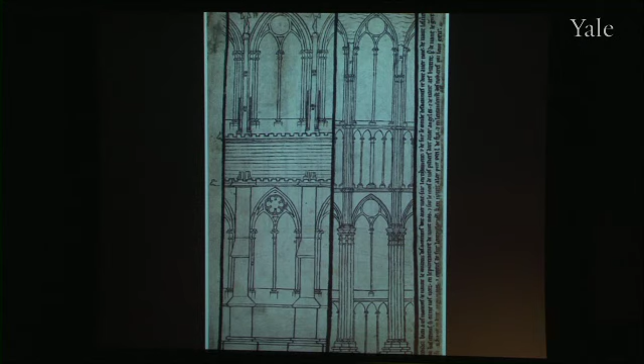If we go all the way back to the origins of representation, we see that early plan drawing was executed directly at full scale. Gothic buildings were drawn on the ground with ropes.

What did the scaled plan drawing, the plan drawn with a stylus on wax tablets or parchment, represent? It represented neither the ropes on the ground nor the idea that the lines would extrude. There was no projective implication. The plan was already on the surface. It was all about allocating areas on the ground. In short, architectural drawing was not originally related to geometry.

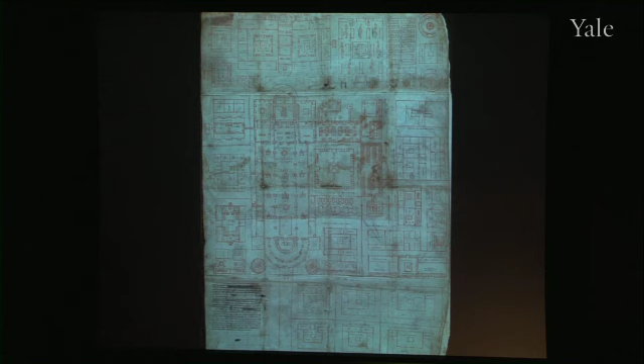Only later would perspective, a foundational element in projective geometry, become considered an advanced form of drawing. What I will focus on now, and what is perhaps most important for the role that projection, as opposed to picture drawing, plays in architecture, is the foundational principle of perspective projection, but in particular, sectioning.

I would like to argue that with perspective came a profound redefinition of what a plan is. There is a world of difference between the pre-perspective plan and the plan after perspective. From then on, plans are implicitly derived from cutting through, as opposed to drawing upon something. And this is what makes them so much like today.

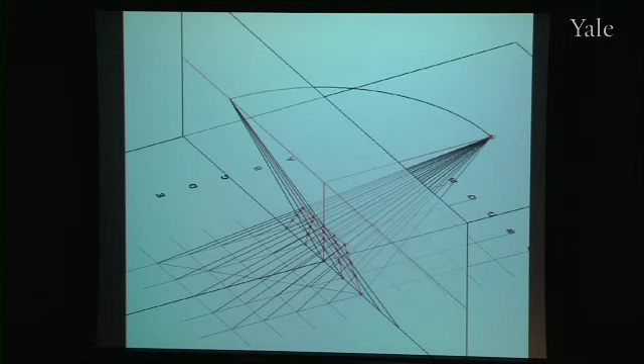It was during the Renaissance that we saw the principles of perspective formalized. The demand for realism and the alliance of mathematics and nature motivated the invention. Projection is a transference of three-dimensional points in space to a flat surface. It translates from 3D form to flatness, and the rays of light passing through points meet in one, the eye, which interestingly, projectively, is coincidental with the vanishing point.

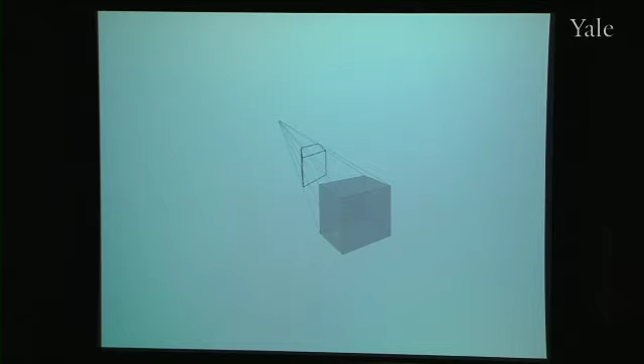A slicing plane, and this is what interests me most, is like a section cut through these rays, and it produces the matrix of points on a surface, which is a section, and ultimately a picture plane. And these points, when linked to one another, create a projection of a scene.

In the 17th century, this changed. What occurred is a description that brings into correspondence the representation of objects and the illusory distortion of these according to the idea of perspective. This is Desargues, who combines the sectioning of solids with perspective representation. Here we see that he has brought these two techniques together, the orthogonal and the conic projection, the parallel and the conic.

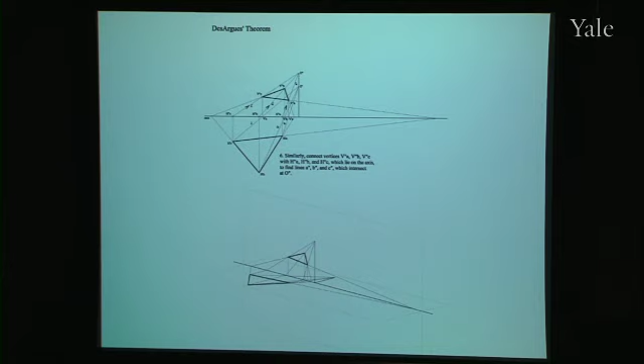And in this way, the two are finally joined. Thus we have before us a situation in which we cannot distinguish between the illusory, the picture, the object, the section. It's all in one system.

So one could say, with all of this behind us, the question of the conference today could be, rather than 'is drawing dead,' could it be that the section killed drawing? I would say theoretically, yes, the section did do that, and practically, no—or not considerably so until considerably later.

Before, during, and after the age of perspective and section, buildings were designed and drawn in two dimensions, both in elevations and in section, and were assumed to extrude, but only empirically, not by projective means. With the arrival of paper, and with Raphael's recommendation around 1518,

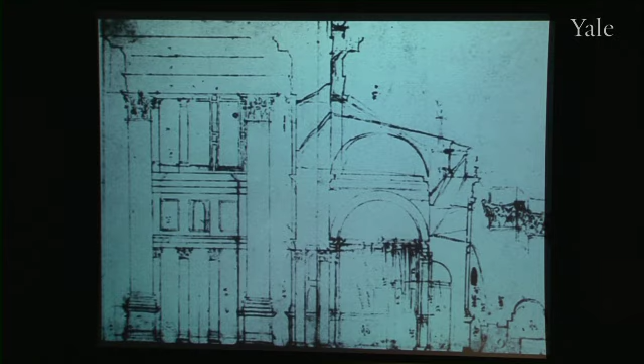the plan is accompanied by the representation of its elevation, but indirectly depicted as a pictorial elevation, showing two sides at once. The projective techniques were only used to pictorially represent preconceived ideas, or were used by the guilds for the purpose of constructing three-dimensional idiosyncratic shapes, units of construction. Projection then was synonymous with stereotomy, stone cutting.

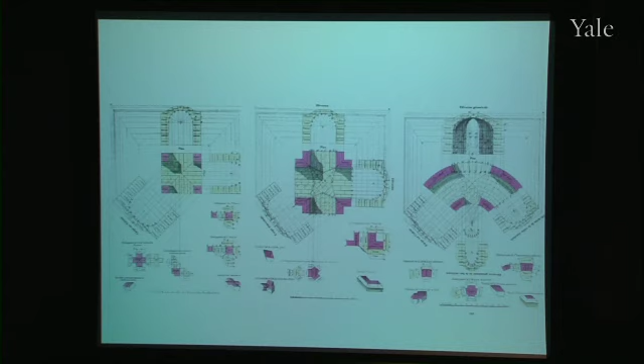In this sense, finally, perspective becomes a means to build the very plan that we understand the section cutting implies when we think through the principle from its origin.

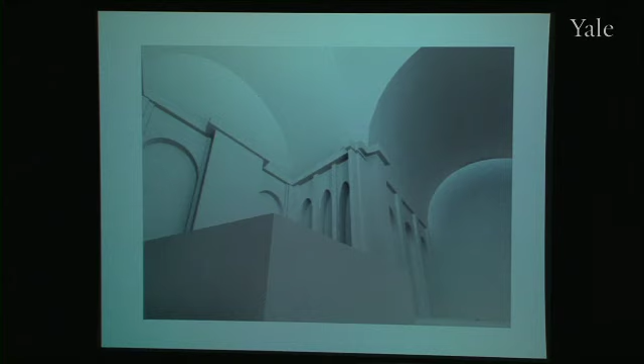Probably the most important implication in the analogy between section thinking and perspective is that they share the idea that the object represented is in some sense a complete whole—an entirely new way of thinking that appears for the first time in the Renaissance. Architecture is preconceived.

Following from it are the plans and perspectives that are cut, projected, and cut again. And yet this idea was not widely practiced or understood. A rare exception came in 1515 with Peruzzi, who used perspective to represent the plan explicitly as a horizontal section.

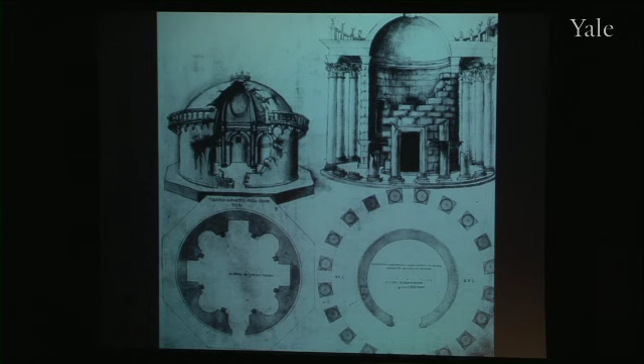Previously, buildings had only been partly cut away in vertical sections. It should be noted that despite the fact that it was perspective which was so formative to this significant change in the way the plan was conceptualized, it would only be used by architects for a very short period, between the mid-15th century and the early 16th, when it was given up in favor of orthographic projection entirely.

Meanwhile, the habitual segregation of empirical two-dimensional plans and section drawing from three-dimensional stereotomy continued, and the plan as section went unrecognized. We can leap forward and see that Corbusier's 'plan as generator' perpetuates this long-held habit of segregating the uses of section, reinforcing the concealment of the logic of sectioning inherent to the plan.

With computer modeling, what we have is not the maturation, but rather the realization of a profound change that occurred with the brief period of perspective.

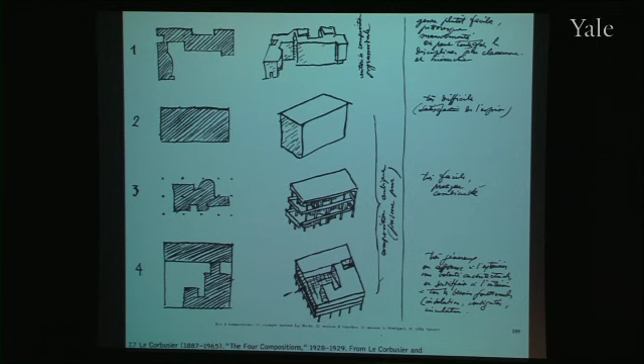Architectural space must keep stacking, however, and it would seem that until otherwise, its levels will still be accounted for in plans. This is not to mention the fact that the plan still holds sway at the drawing, as the drawing convention that correlates with the navigation of architectural space, something that the section does not do, the vertical section, that is.

The computer has brought about overall building forms such as this one that do not extrude from two-dimensional originary plans at all. Clearly, the process has been reversed entirely now. We have three-dimensional forms fully formed, literally, not only in the imagination, before we make plans.

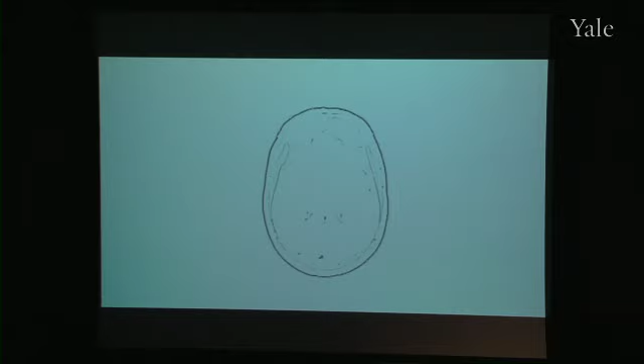And so, finally, plans and sections are literally results rather than origins. Now, there are buildings for which a plan is not only not a generator, but is anatomical. I call this type of plan anatomical since it is like an anatomical section. It should be noted that this extreme idea actually has, as one of its main progenitors, this building.

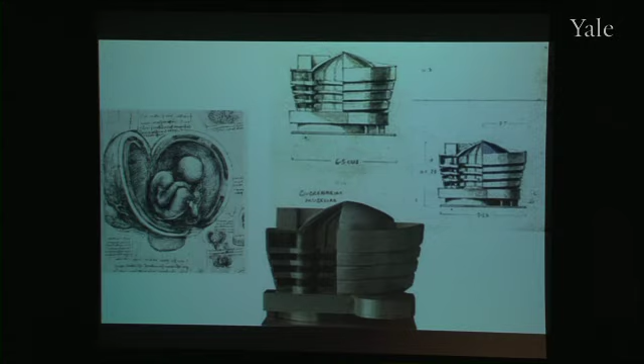A pre-computational building, of course. And we find here the idea most explicitly represented that the plan is of no particular consequence, insofar as one would think of it as a generator.

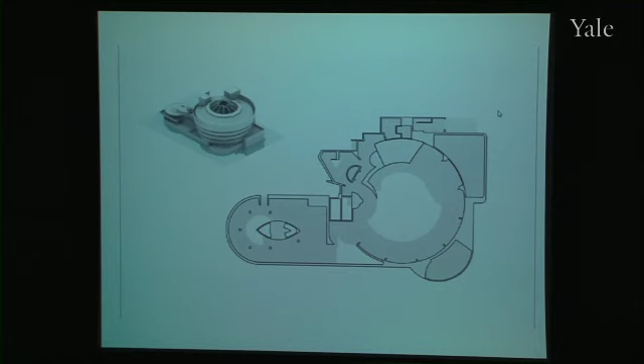The plan instead is more like, at any point in this building, a single frame in a succession of frames. And here, for the first time, we have the analogy to the filmic medium. Without extrusion, we have a continuously developing form of architecture in which any plan represents the principle of projective sectioning, finally, and most straightforwardly, which, as we have seen, superseded drawing long ago with the arrival of perspective.

Just to be clear, though, we are a very long way, of course, from the time in the early Renaissance before Raphael, when draftsmen who thought above all in terms of plan would often find themselves somewhat surprised by the exteriors which resulted from their plans. Now the building is embodied fully a priori.

With plans behaving as projective sections in succession, and in particular with the skyscraper, we recognize the changed significance of extrusion. If the filmic medium becomes a more apt analogy for architectural representation than pictorial perspective, extrusion assumes a new definition.

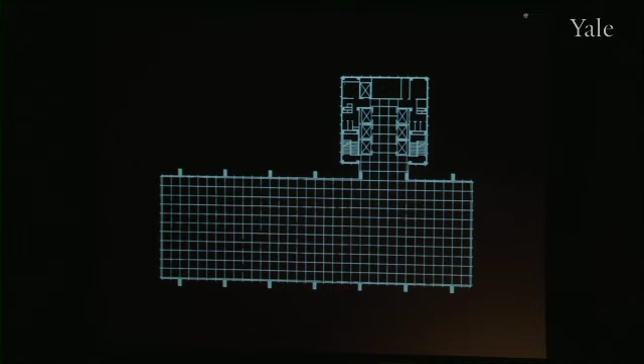A new definition exemplified most typically by this modern skyscraper. For extrusion, too, produces a continuously developing form, but not with a changing shape.

Here we have a very interesting moment where a building turns into a very particular genre of film. It may be useful to take this analogy to an extreme and understand that if the Guggenheim is filmic, it is conventional narrative film, continuously changing and developing a form over time in a very particular way, and very linearly.

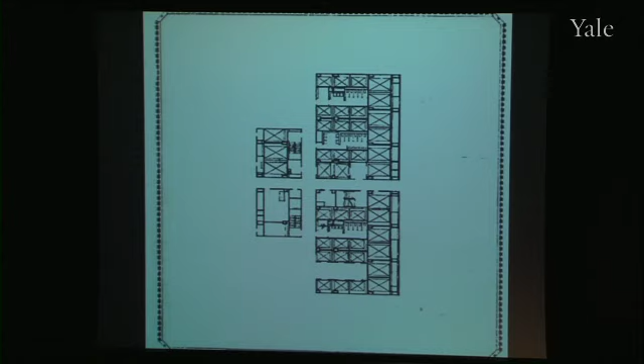But if the extruded skyscraper plans are slices too, then it is analogous to non-narrative film. And we could, just now, make a parallel, and this is a stretch and a peculiar one to make, but I think useful for this argument, to films like those of Warhol, and here we have Sleep, in which the content is radically reduced, becoming secondary to a fixed shape.

That is, the figure almost not changing, fixed, at least in the mind of one who expects a narrative. Little changing from frame to frame, hours of inactive sameness as opposed to development. Warhol encourages distraction and wandering attention, and in this sense, clearly has moved film toward architecture.

It is interesting to recognize that extrusion, the most typical formal attribute of modern architecture, that is, as it produces stacking, perhaps more than anything owing to the elevator and the steel frame, which we continue to have to deal with, despite all of the fluidity that Patrik seeks.

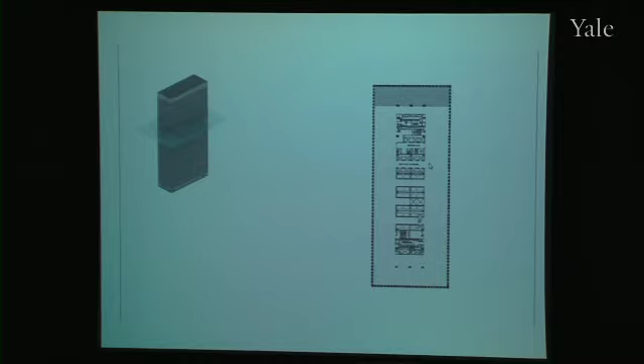Perhaps more than anything, this is what makes these radical avant-garde films more analogous to architecture, and much more so than the rare anatomical forms which, despite being prevalent in the academy, are rare in the world, that is, those which actually are closer to conventional film, those forms that are today so popular that I'm referring to.

You saw there the cutting plane of no consequence moving through the tower, whereas, of course, in the Guggenheim, we saw a development occur.

Now we have something else, and this is the concluding point. Perhaps the essential distinction between the anatomical and extruded buildings, both of which populate the imaginations of architects one way or the other, whether they like it or not, the essential distinction between them and their plans is determined by the concept of duration. Sleep demands the audience to endure the unendurable boredom of sameness in a medium that is expected to move and develop.

Conventional narrative film precludes any recognition of the constituent frames that build its movement. Between these two architectural extremes, the anatomical versus the extruded, or the narrative versus the non-narrative, there is another model, the montage, which makes explicit the role of spatial successiveness, the stacking inherent to all of architecture after the skyscraper, as represented by the plans that pile up and do not change, analogizing the cutting and editing we have been talking about.

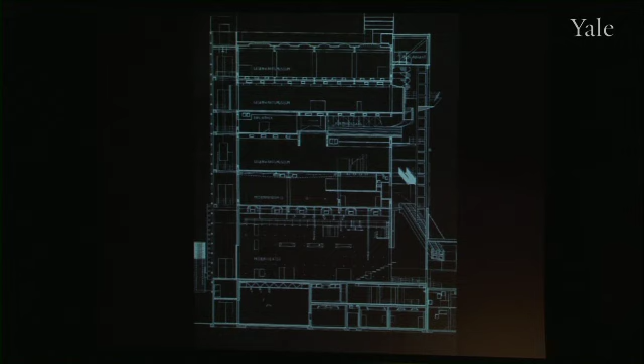The closest architectural project to La Jetée is Koolhaas's Karlsruhe Center for Art and Media Technology, composed of discontinuous and differentiated plans. Inside the rather cubic building, plans populated by the vertical struts of Vierendeel trusses alternate with open plans to produce a stack of spaces that, like an architectural montage, evokes a series of radically different architectural types, arguably the architectural equivalent to time travel.

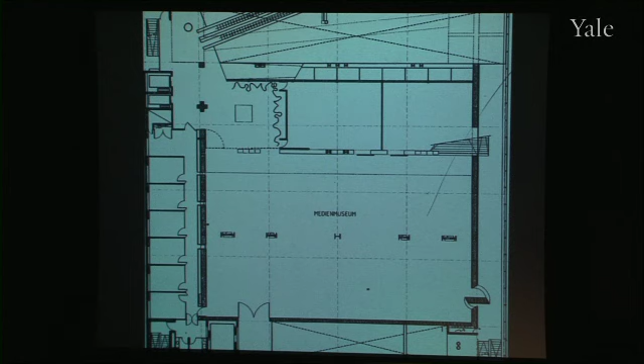Thus we have here a building that exemplifies his theory in Delirious New York, where piling, slicing, and piling up is caused by a culture he calls congested. Only the extrusion of the envelope maintains a constant that holds the disparate interior plans together, just as linear sequence, by definition an unassailable technical support of the filmic medium, holds together the stills of La Jetée.

As a tentative conclusion, recall that the concept of sectioning and perspective projection once seemed to be an advanced form of drawing. But for architecture, projection now appears to have been the harbinger of an era in which the plan would be defined as one of a series of successive slices through the three-dimensional models and structures that truly govern architectural and spatial composition—that is, after it's been thought that way.

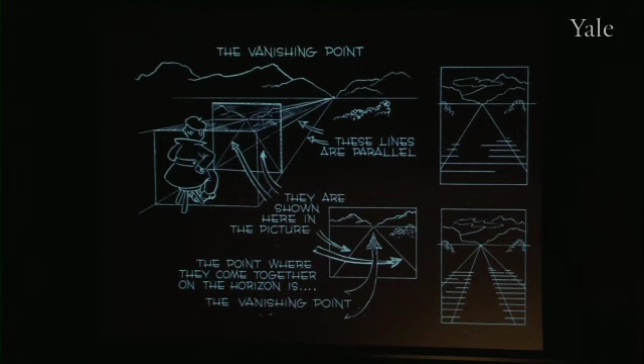So if we look at the vanishing point, there was a moment where it was a very simple thing. We all learned how to do it, and train tracks were the way you could understand convergence.

But if we step back a few centuries, the criticality of the vanishing point eluded painters, and by attempting to suggest depth and distance, the diagonal line and diaphanous backgrounds implied the inhabitation of a territory where buildings and landscapes were infinitely larger than we could imagine on one paper.

But the control of this vanishing point, if you will, to accurately depict depth and distance aided the representation of architecture. And architects, who were also painters and set designers, leveraged the compressed space of the stage set to suggest not only infinite depth to one vanishing point, but perhaps to a few, multiple vanishing points.

So you could say that the distortion necessitated a precise location, or station point, of the implicit picture plane to allow the panoramic access to the multiple vanishing points, and the single vanishing point with the converging diagonals in the center shifted over when the diagonal came into play to something far more complex.

In fact, you could say that Alberti in 1435 had advertised the perspective method in his book On Painting, and that how-to was extraordinarily influential.

But perspective has been a suspect tool, and critical voices of the Renaissance, while acknowledging it generated more precision in the potential, observed that it was a deceitful practice, always distorting true measure.

So Piranesi was a very skilled man in many ways, but also a skilled theater designer among his many talents, and he took liberties with the vanishing point. The act of drawing, actually inscribing an etching tool into the surface of the metal, again resistance, suggested a more indeterminate, more simultaneously, ultimately incomprehensible territory of infinite and inescapable depth.

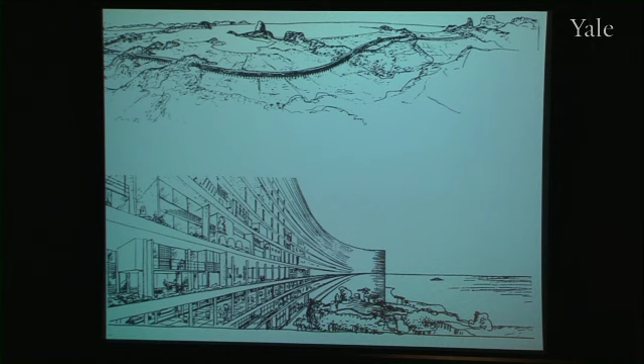So as a student here at Yale, the emphatic monumentality of the drawing reflected the climate of the time. Stirling and other modernists were changing the way we were seeing things, and in the axonometric, summarizing the totality of buildings, diagram, and idiosyncratic massing all at once, was the ultimate expression of invention and control.

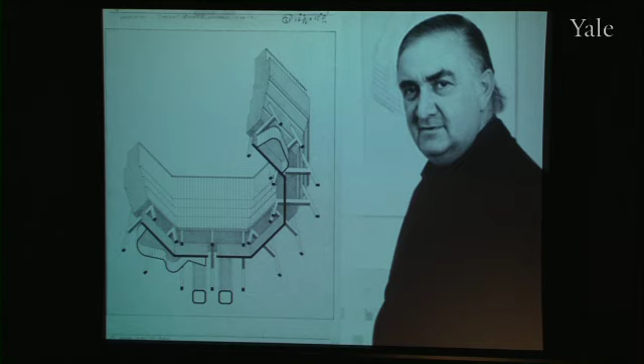As students in Stirling's studio, we understood the necessity of the fully measurable, impeccable, ink-lined organizational authority, the airily disposed axonometric, or in this case a worm's-eye view, and we knew that this would be the necessary pinnacle of our studio project.

I was maybe a little more taken with the building we were in, by its kind of sectional clarity and Rudolph's incredible sectional perspective drawings.

And so you could say I was not a good compliant student in Stirling's studio, because while it was easy to emulate the axonometric axiom, I felt a certain dissatisfaction in the distance between the precision of the inked drawing and the tactile impact, and in the certain boundaries of the charcoal drawing. So I did my ink drawings, and I hated them, every one of them.

My project was fully measured. And so I returned and was reluctant ultimately to commit to the precise line, because I didn't like the way it looked. I had not yet been able to rouse my own enthusiasm with this axonometric axiom.

And so the penalty of procrastination were these drawings, which I was trying to get at something that was not quite real, not quite there, not quite inhabitable, but fully inhabitable and simultaneous, and somehow a momentum of territorial expansion was something that I was trying to claim.

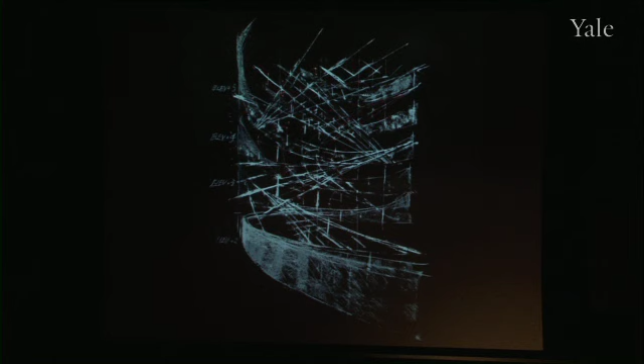You could say it was a challenge, because if you look at what it means to start thinking in more parametric terms, the pre-parametric—as Scott Cohen pointed out so eloquently earlier—was something that Michael Manfredi and I, since we draw together, have been preoccupied with: messing with or noodling with territorial clarity and crossing those boundaries. This messiness or dirtiness is a point I want to make.

Jasper Johns in 1979 talked about how much he liked to do a drawing, do it again, and do it again in a different media to see what he would discover. Every time he would discover something different—that resistance would offer a new discovery, and sometimes that discovery would go to white. Sometimes the numbers, again and again, would become so compelling to him that he had to make tactile sculptures and surfaces some 25 years after those drawings were made, not unlike Piranesi returning to his etchings, creating something so tactile and measurable that it is indeed physical, almost architectural.

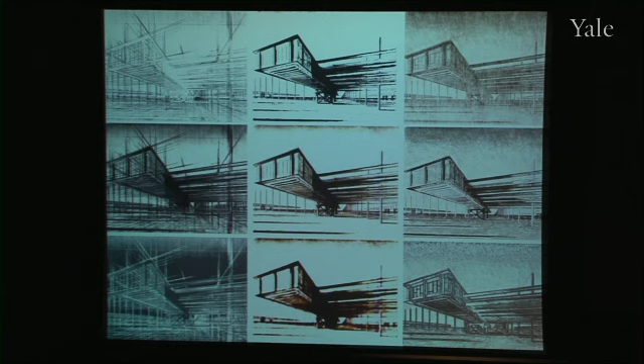So I taught a drawing class at Yale when the parametric paradigm started, in a sense, ascending, and I wondered whether it was possible to sustain the uncertainty of hand drawing and wet media on plastic, and then use the computer to distort, amplify, intensify, and make new discoveries. By using very simple drawings and photographs, those would go into another wet media on plastic, which Jasper Johns so loved, and those could be intensified in digital terms—translated into things that might sustain a more tactile, haptic world, or even become something like a two-point perspective that changes over time as media gave it new light and intensification.

So all this is to say that these preoccupations of never finding a finishing point to the vanishing point gets to the surface of our work.

In our work at the Barnard College Diana Center, while we had a very spatial idea of the diagonal to connect and allow insights to be seen simultaneously, we also wanted to break down the hard surface of a glass box and consider the spatial connections we might see through it in conflated, compressed, oblique ways—the surface itself was something we wanted to think about. The drawings or sketches in charcoal—we love the indecision of them and the indifference to the finish line, and tried to sustain that indifference in the surface of the glass.

So the frit pattern took the whisper of the charcoal, and then the acid-etched glass—with about a year of experimentation in Germany—externally acid-etched, internally color integral, spectrally selective glass that we tested in different ways, could, with the back pan 4 inches behind that glass, share the luminosity of either red or copper depending on the light, always changing and never staying fixed in chroma.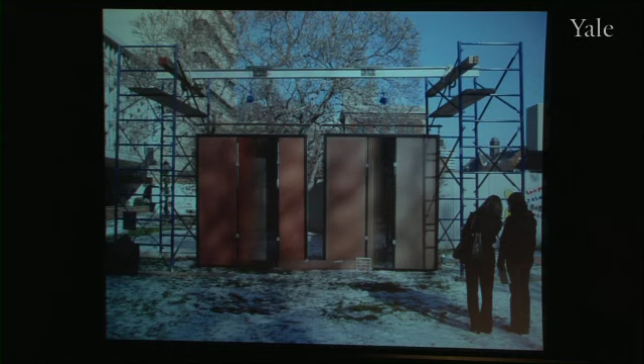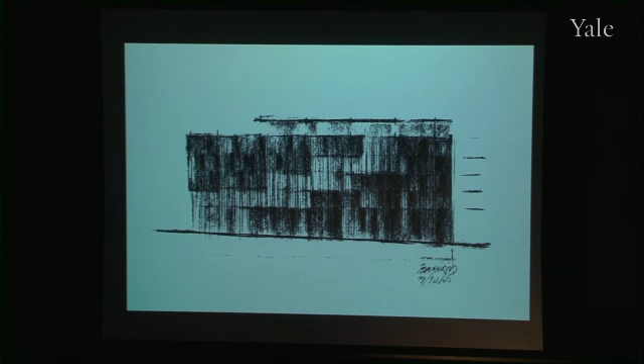That kind of collaboration between the tactile surface of the charcoal drawing and the tactile thing then needed to be analytically taken forward with a sectional, sequential, connective identity that could change, connect, and bring forward—ultimately taking something indecisive at one point and concluding with something more precise.

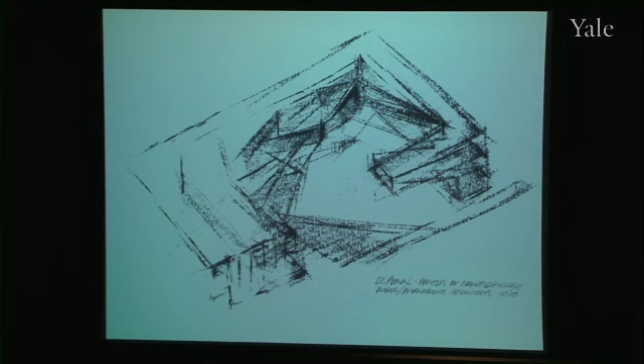This exercise, if you will, is under construction right now at Penn with the nanotechnology building we're doing. There's a case that demands immense precision because it's all about incredible structural stabilization and also no electromagnetic interference. So how do you take the instability of the charcoal drawing, the gesture of the perfect concept plastic model...

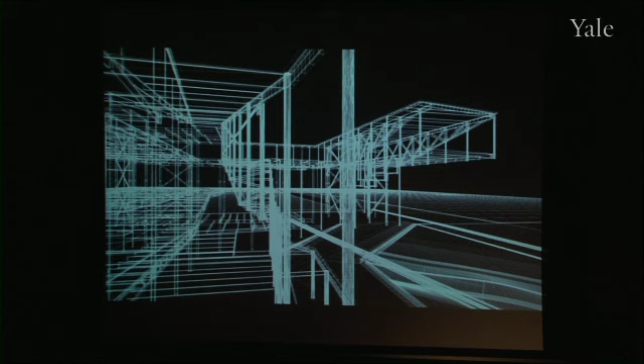...the indecision of a cardboard model, the slightly more decisive discussion with the client, and then the great precision the parametric tools have given us to realize something that can move around, allow us to spatially create multiple vanishing points and sequential movement—under construction now, as of last week—and start to envision what it is to inhabit something that makes you pull forward, feel the tactility of these vanishing points, and imagine the transformation of a space that might open up, shape a new landscape, and inscribe its way onto an urban surface.

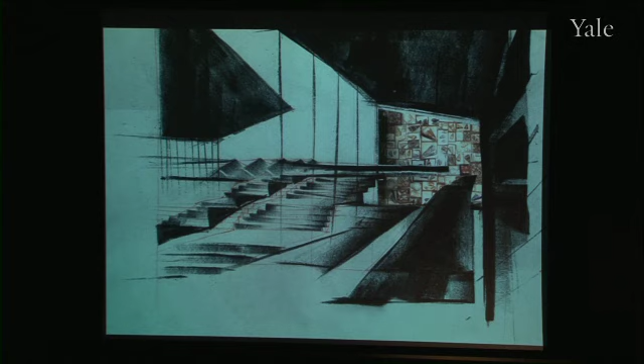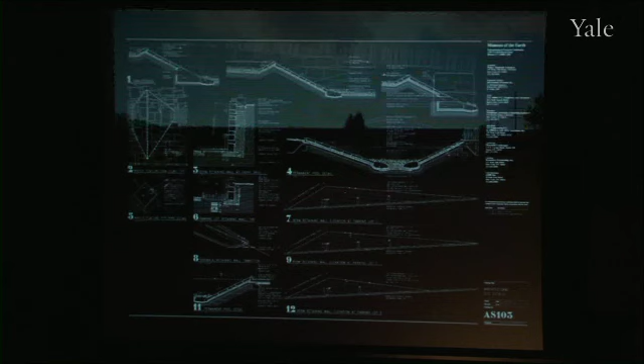And that inscription then with the Museum of the Earth in Ithaca, New York, is now topographic, and the etching and carving into the land and the convergence of topographical and topological change is tied to the kind of experiential first impulse collages that allow us to imagine taking those things more precisely into the earth, sequentially, sectionally moving, looking at the gathering of water and the convergence of something that might collect water, taking that Nazca line again to make that site look substantially larger while it's doing an operation that collects water and inhabits the site in a completely different way.

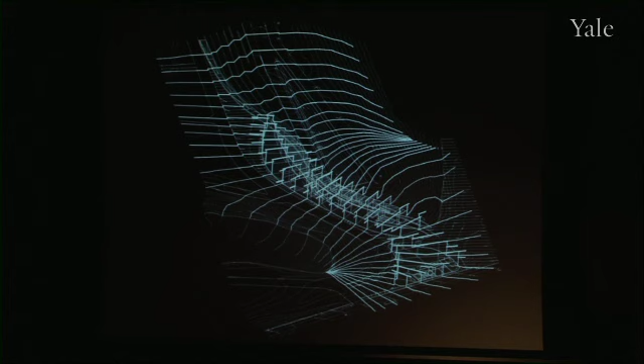And this inhabitation, currently under construction, the Brooklyn Botanic Garden, is something where the idea of Olmsted's wandering paths and a kind of softened topography were the instincts we had when thinking about the city entry into the garden. But then there's a kind of wild sketch of what happens when you say, all right, we've got parking on one side, we've got movement, security, topography, section, water collection, all these things, and the distillation of these has to go through a rubric of sequential sections that change, going from urban to something that just joins the land.

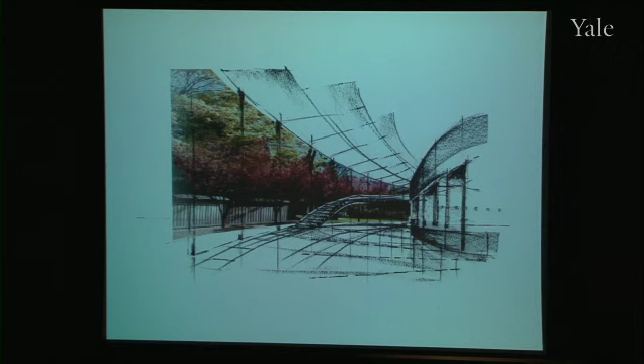And so these loose togglings between wandering lines, or the inhabitation of the edge of the garden, or maybe two distant vanishing points on either side, or an inhabitable topography that might be softer in surface than what the parametric steel plan allowed us to do, could be so soft that maybe the sensuality of that sketch line and the tactile surface of the charcoal drawing could come together.

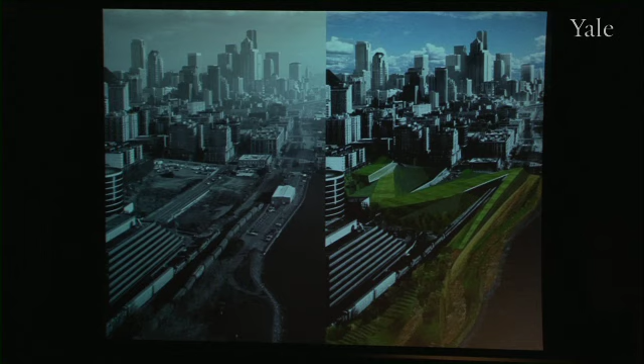So in Seattle, this question of what it might mean to just collage a new topography onto the city, and again that rough sense of, oh my God, it has to do everything all at once - remediation, speed, movement, sectionalization, salmon habitat, surfaces for art, etc.

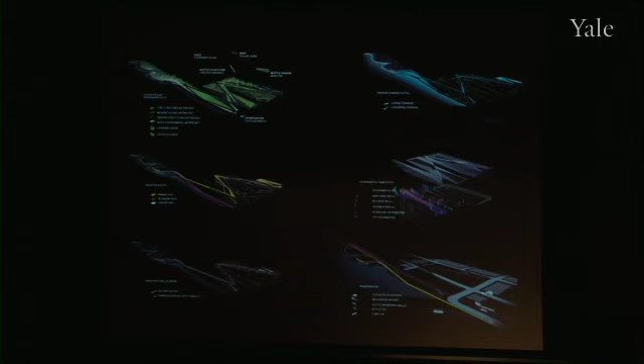All those layers need to be analytically, organizationally thought of in layers, including contamination remediation, topically organized. And so we're always thinking about this kind of cinematic potential of lateral contours and vertical sections being conceived simultaneously, allowing us to imagine a constructed topographic landform that could ultimately connect two disparate parts of the city.

So a kind of strange conflation of sketching, thinking in section, and sectional perspective to the making of this convergent line, these angles trying to enlarge a site that's actually tiny, only 9 acres. And all these diagonals allow a simultaneous embrace of roads going through it, under it, over it.

Across on the horizon, this kind of mix of media in our thinking has been the cast of our preoccupation with the layered intensification and aggregation, or condensation of a bigger world, like a theatrical world, in one very finite place.

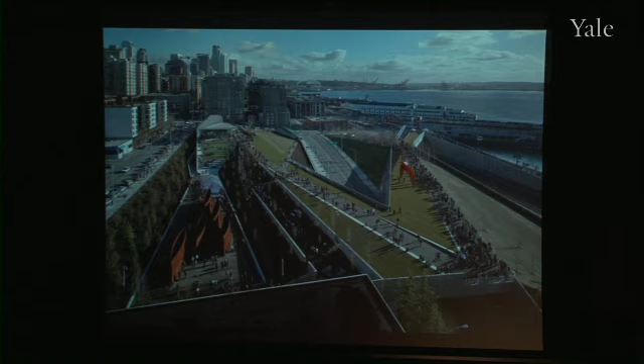So I guess it's that dirty secret, if you will - the native potential of different media, the intensification from repetition, from doing it again, trying it again, and doing these superimpositions to intensify through repetition, the potential of something, that irritating little point about what it might be. And so all this combining of tools, the distortions, the effects, the surfaces, the potentials, the movement, the cinematic, all of this, in a sense, suggests to me that it's a fictional finish line to say that drawing is dead.

That somehow the iterations, scenarios, and options from the charcoal sketch to the digital frameworks to the surface effects - that somehow the back and forth of these medias, including digital media, allows an approximation that allows us to postpone conclusions, but to somehow enrich our process along the way.

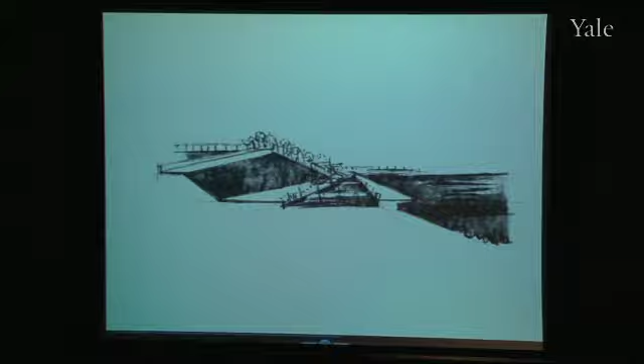And so, if we say that the kind of soft indecision of the material of the charcoal could change this building's thinking from a hard glass into something else, we could say that even with Seattle, the real vanishing point starts to touch on the issue of the premature obituary that I think has been read for this conference. Because if the point of an obituary is to summarize in short order the virtues, contributions, and impact of an individual that is suddenly gone, usually the glowing setting aside of the weaker moments is what obituaries do, and they have a curatorially polished selection of milestones to let us know what was great, but what is gone.

But for us, the promise now, with the glow of the digital paradigm casting shadows over 6 centuries of drawing, is not saying that it's over, but in fact giving us a moment to leverage the opportunity of the simultaneity and capacities of all these medias to draw out what is yet to be imagined. So my final point, the vanishing point, is that there is no death to drawing, but only infinite richness in that vanishing point that's beyond us. In this framework of media in motion, testing sequentially, somehow all of us have yet to draw something we have yet to see. Thank you.

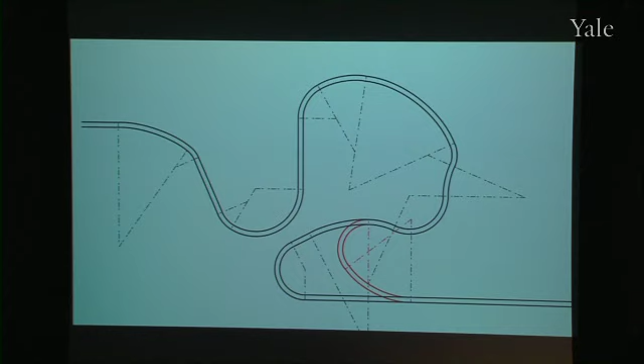I actually went to Princeton to learn how to draw these. This is something I whipped up on the way over here—it's a composite curve network made out of a series of radii. The reason I wanted to learn how to draw it is because you can offset wall thickness with it, whereas with one of these things it's a nightmare and very inaccurate. You can also change regions of a curve network like this without changing the whole thing, which you can't do with a French curve or a flexible curve.

So I went to Princeton because I knew Michael did the Snyderman house, and I wanted to learn how to draw those curves up there in the Snyderman house.

What's funny is when I got there, I found one of these mechanical splines. There was a German student, two years older than me, who had one of these things—this is 25 years old, and I had three of them. I tried to unroll one to take a picture and it fell apart. There's a rubber profile with all these discs. It's a very old drafting device called a spline—you draft coordinates for the discs, tape them down, and make a spline curve. It comes from the shipbuilding industry, but civil engineers were using them like crazy.

I got to Princeton and found these. I don't even know if Michael remembers, but it was like a virus—all the students had these by the time I graduated. What was interesting is it turns a curve into a series of infinitesimal line segments rather than arcs. They're all little short straight lines just smoothed with the spline curve.

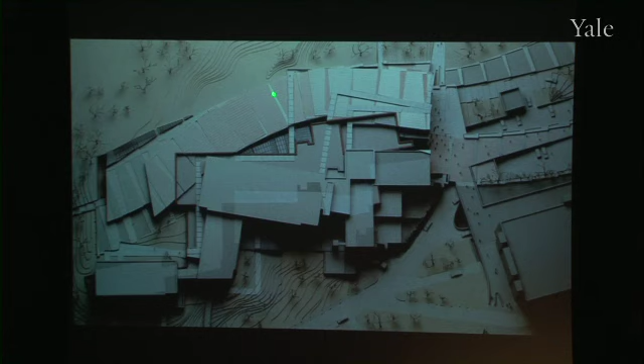After Princeton, I went to work for Peter Eisenman, and Peter at that time was doing curvature without curves. This is something for Peter's analysts probably, but I spent—you can see these are, I believe, I'm haunted by it—I think 130 blocks rotated in plan and section, three stacks high.

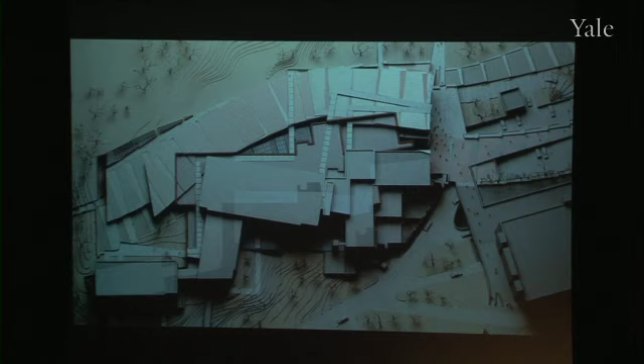Also the Frankfurt Biocentrum, which came before this, did a very similar thing with arraying profiled elements along curves, but without actually using curves. At this time there was software to array these things, but there really wasn't software to work fluidly with those elements.

But one of the things I discovered with this ability to make curves out of incremental line segments—which is what a spline is—is that there's the curve and there's the normal, which is the line perpendicular to the tangency of this virtual curve.

When I left Peter's office—another anecdote—don't let Bob Somol pick you an apartment in Chicago. He found me an apartment in a building which I found out was for blind people. So I was in this little room, a kind of Barton Fink era of my life. I spent maybe a day building this model of the Sears Tower laid down, for a show Stanley Tigerman was doing.

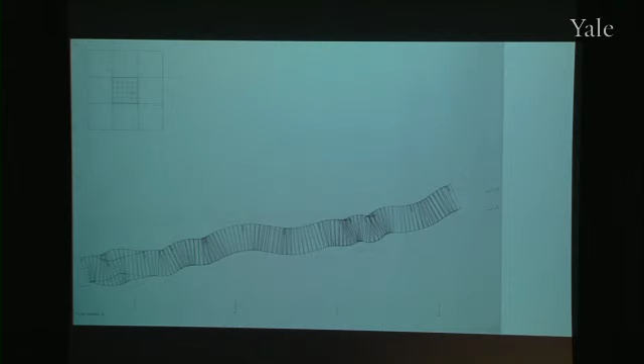I spent 3 months, maybe 12 hours a day, drafting all 110 floors of the Sears Tower—first rotated in plan, then projected in section and rotated in section, then projected back into the plan and rotated in plan, then back to the section again. There are 9 of these tubes. I produced these drawings with an incredible amount of labor, using MicroStation, which was the first program with spline modeling tools.

A couple years later, I did this whole operation in maybe 15 or 20 minutes just by animating blocks along paths. So I think I'm the oldest person who models with the computer, I believe. I've been looking around to find somebody older, at least who's been doing it longer. So I'm like a T-Rex.

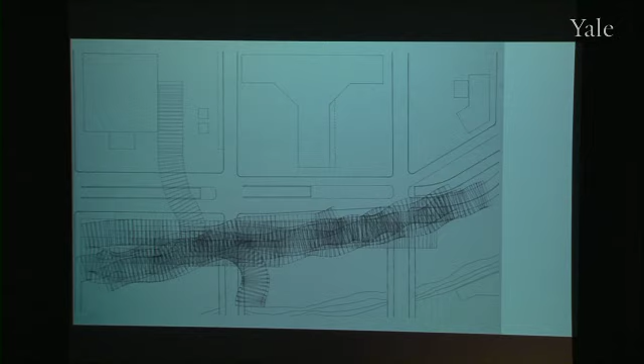But anyway, I'm glad I did these things. I wouldn't have thought—every day when I animate something along a path, I actually remember the labor involved in not doing it, but I also understand the principles and the projective geometry of doing it.

This idea of incremental sweeps and animations was also used for a competition for Cabrini Green, where I manually drafted each of these elements moving with an adjustable triangle. I was obviously waiting for the computer to do this for me, but before there was a program available, I was already thinking of this kind of thing—now you'd call it an array, but it was an incremental change in gradient.

It's just to make the point: all of this stuff was being anticipated before it had arrived. It's not like it arrived with a shock. It was kind of a welcome thing for me.

I'll show some more examples. These branching diagrams were also drafted—this was for the Cardiff Bay Opera House competition, I don't actually remember the date. I was branching these based on a thing called Bateson's rule, changing the scale with every iteration and branching. You'd now call it some kind of procedural modeling.

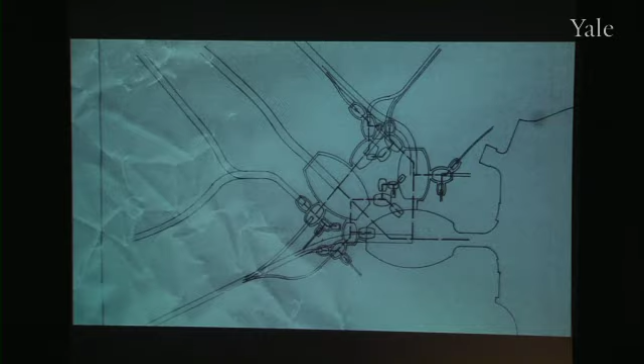Now if you use subdivision surfaces, you're using an algorithm by Chaikin that smooths corners. But at the time, I had this idea where the volumes, when small, would have less resolution—like four-sided—and I'd knock corners off as they got bigger and bigger. These were all manually drafted using those branching and smoothing rules, drafted in section as well.

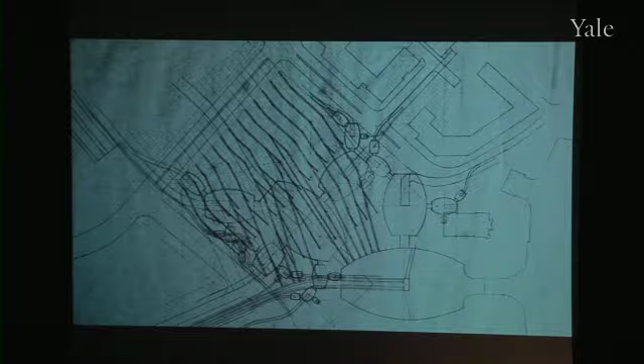Once this software was available, I started to sketch with it. Sketching with the computer at first involved learning the medium, but I've never found it to be expedient—not as expedient as a pen or a pencil, though.

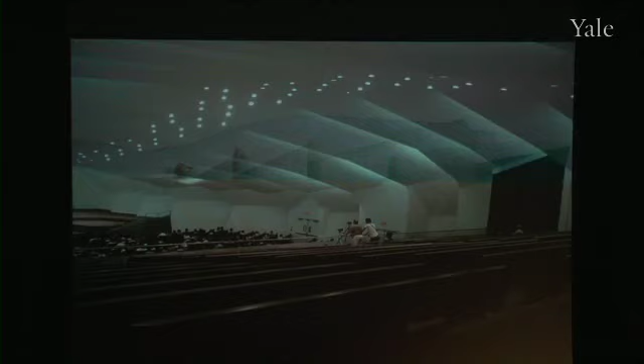These were real early studies with a blob modeler from a program called Wavefront that we used with Doug and Mike for the Korean Presbyterian Church. The logic of the model here, which were very randomly placed, ended up following the rhythm of the structure of the building, informing the way it was modeled as a surface with these offset planes, and fairly directly went into the logic of the construction.

This was a project sketched entirely digitally—we don't really have any hand sketches of it. I have to say, for a long time, I quit doing a lot of drawings.

This was maybe the first drawing I could find, I think 2 or 3 years later—a diagram for the Ark of the World visitor center in Costa Rica. It was trying to work out an idea of lofting, where there was one set of curves you'd call a path, and another set of curves that were profiles. I animated the profile and swept that animated profile along the path—you get a massing like this.

In this case, it was really a sketch that came before the massing. As I started doing more sketching, I found I was kind of sketching for the computer—what I was drawing was really drawing the way things would get modeled, even putting little dimensional notes the way things would get modeled. These things aren't really for popular consumption, not really to fax back to the office, but just to clarify things.

This was a funny little anomaly I found. I turned off these things called curve loop cutting because the surfaces were folding through themselves and making problems. I turned off this tool and found these things industrial designers call blebs—where you offset thickness for a spline, it folds through itself.

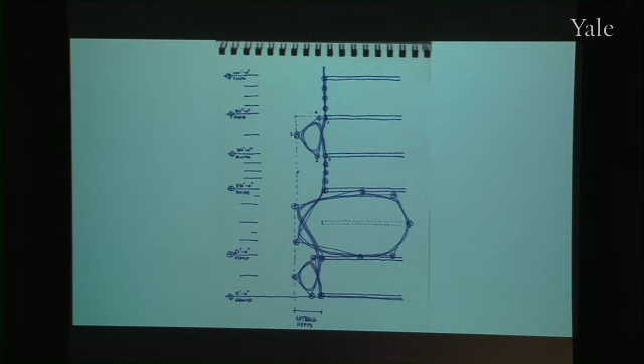For the Eyebeam Museum, I used this as a kind of facade idea: take the skin and fold these cantilevered exhibition spaces out to the street, then fold the auditorium into the facade and fold the lobby out to the street. These little diagrams were made before and during the modeling to clarify the massing.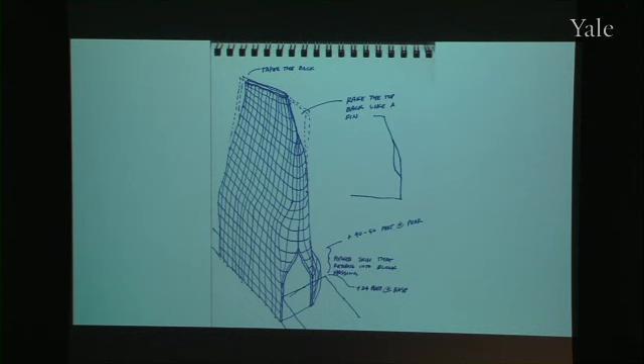But anyway, these started to look more like things from the computer. These are the kind of controlling curves of the skin, and just some very quick renderings of it, a little study model.

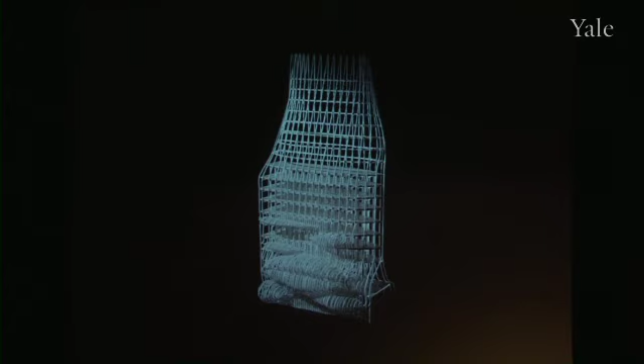It was also around this time that I bought a laser cutter and a CNC mill and did, again, what Andrew mentioned—machine legible design, which I thought of as high fidelity machine legible design. That, if you don't mind, I'd like that to be my new moniker. So I then started to think through how to talk to machines that are fabricating construction elements.

For this little study for a house, I remember doing it at the conference for Michael's retirement at Princeton, while Hal Foster was speaking. I was sitting in the audience and did this little doodle for a structure because I didn't have a computer near me. The idea was that the structure of the house is built out of one continuous rolled tube that would float the house. I'd just seen the Lina Bo Bardi house.

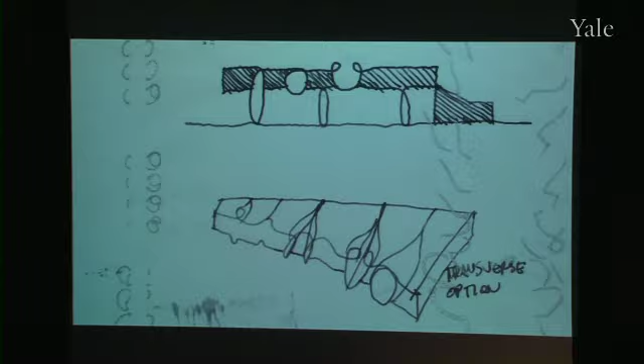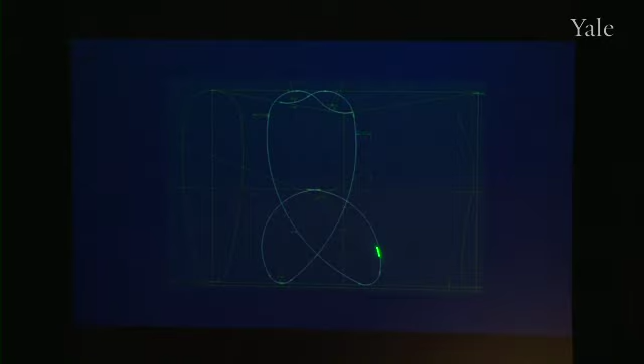From this diagram I went directly to working with Robert Aish at MicroStation, building a little parametric tool that would build all these tubes as composite curves because they needed to be radial curves. So instead of drawing a spline and converting it to a radii, these start with the radii, and you can move elements around. They automatically generate this composite curve drawing.

The other kind of drawing tool that I find very powerful and useful are expression tools. Really, they're the basis of what people now call parametric modeling. I started using them from tools built into CAD software for animators, to try to attract animators to digital technology.

For this Alessi coffee set, you can see there's a series of 8 or 9 curves, which I designed for how you'd grip the pot. Then by combining those 9 curves in 4 positions, we came up with tens of thousands of options.

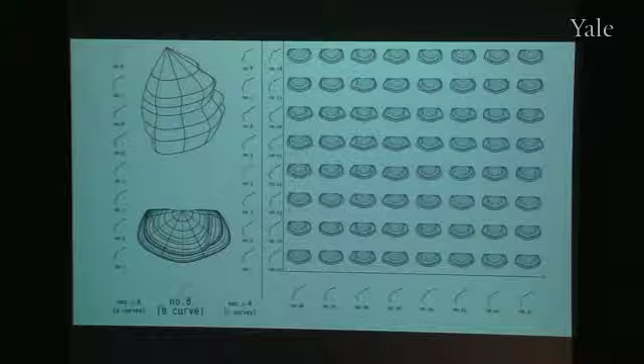For the flatware for Alessi, a very similar approach—I've shown this before, so I'll go quickly. I designed a primitive, which could be a fork, a spoon, or a knife, and gave it traits, then used animation software to blend between these different traits. Here's some of that flatware as produced. Again, you start with a primitive and you vary it.

But for me, the ability to sketch these forms using animation tools is what was important.

And then finally, for me, a logic of surface minimalism, let's say, which I now know is going to be very big with your occipitotemporal lobes. What it is, is a logic of using spline surfaces to integrate components and parts. It really started with products.

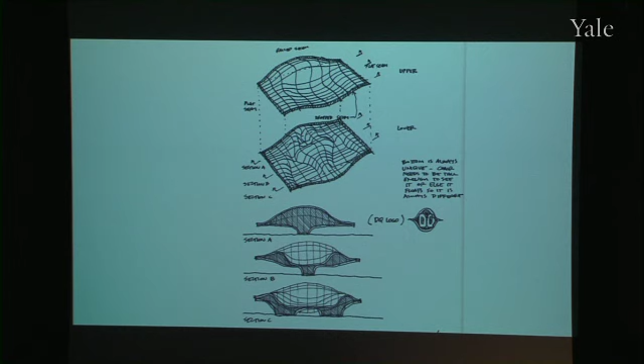This is a little sketch, the very first one I did for the ravioli chair, with the idea that there's a hard surface that does everything that legs and a base would do, and a soft top surface that does everything the arms, seat, and back would do. So you'd integrate all these components into 2 spline surfaces—one hard, one soft. That's the finished chair.

The Alessi supple cups—this is really where I'm drawing from computer modeling: a container to keep liquid hot, and then a second skin which you grip. All of these points are defining the limits of splines and how they would vary and get lofted to produce these volumes.

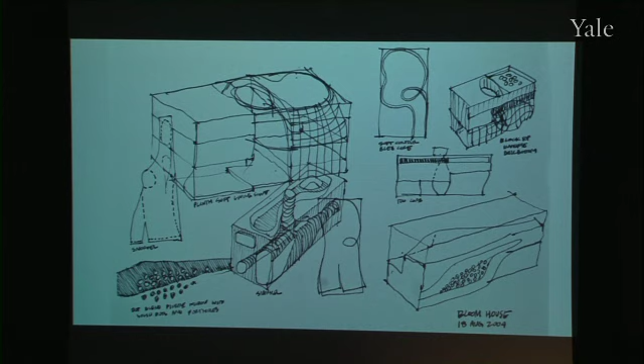What's very funny is I hadn't even looked. This is like the worst drawing I ever did, so I'll move it.

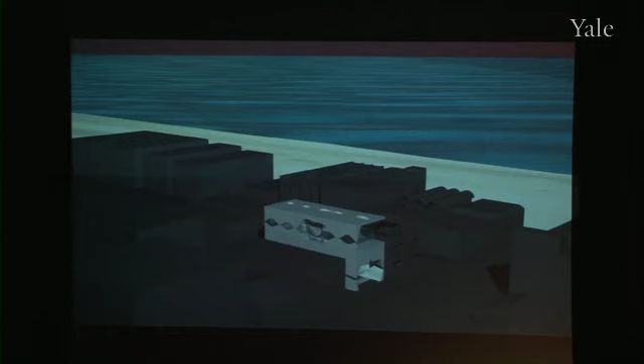The first model I did for the Bloom house was actually this set of 5 surfaces that were quickly lofted. I looked at the times and dates of the file, and these are 10-minute sketches, really very quick little sketches to get the massing on the site and see options.

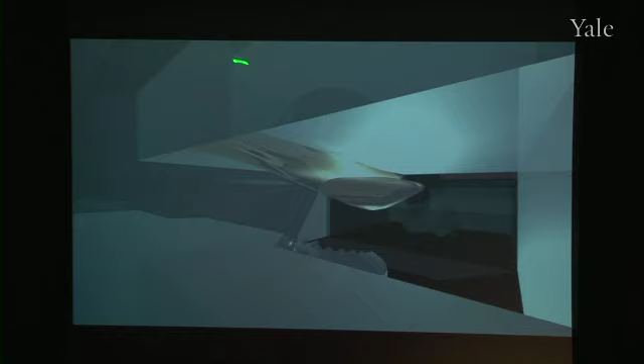There were 4 or 5 options, but this is closest to the finished house where there's this kind of open corner. This top surface and bottom surface bite together to form these eye shapes, with this open front and hanging lantern. It's very funny, it was kind of all there nascently in a little 10-minute digital sketch that we could quickly render.

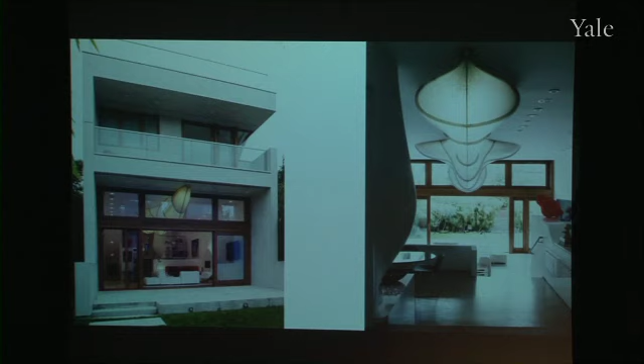It was really the diagrams and the drawings that had to catch up to that. Sorry to jump, but you can see that a lot of the basic moves, that corner, were there in that very first digital sketch, which is where the first ideas for the house came up.

This is that kind of surface minimalism, that thing that part of your brain would love, because there's no fireplace sitting there, there's just a space that swallows the fireplace. Same with the bathrooms, toilets and sinks and everything all get kind of absorbed into this wet wall.

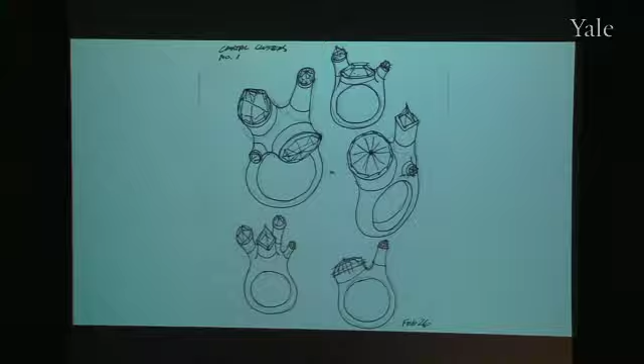Looking to the future, I remember with the Port Authority project, which was the first animation sketched thing I ever did, I had to set up something in the computer, hit enter, and wait 12 hours for it to give me a result. And I haven't had that experience for a while.

I started using computational fluid dynamics because I'm interested in the design of moving objects, and not only the fact that you design these things in a fluid and shape them in a fluid, but also that when they sit still, they have to look like they're moving.

There's a naval architect who now works in my office full time, and the 2 of us have been playing around with using this computational fluid dynamics. We send a file to a 60 computer cluster, and it takes 7 days to give us something back. Once we have it, we can visualize it and move it around and look at it, but it's really, really slow.

But all I can say is that when it gets real time, which it'll do very soon, it really changes the way you think about space, because you're designing in a space which is active.

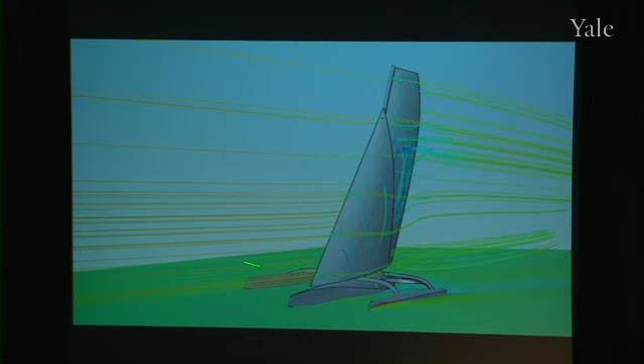I don't know that much about boats, but I just do stuff and we put it in the machine and see what the consequences are. The naval architect has an intuition about it, but what this boat wants to do, because it goes 25 or 30 miles an hour all the time, is it wants to flip over end and bury its nose.

So one of the things we did is we get back images like this. This is what's called flow separation, which is a bad thing. We try to minimize that with styling and the surfaces. But I came up with this chine and this fold in the bow, and it turns out when it dives, this helps it lift back up out of the water again.

What's great about this is you're putting forms into an analytic matrix of flow. You can experiment like an amateur, but it gives you back performance information, and it really changes the space you're sketching in. Because for the first time, the space you're sketching in is actually moving with force and direction, which for me is the most exciting thing I've ever come across with a computer after 20 or so years.

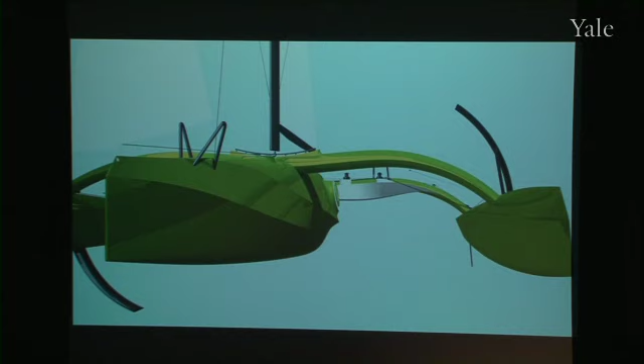And this company that's doing this work actually primarily focuses on super tall buildings, so they're already deep in the architecture world.